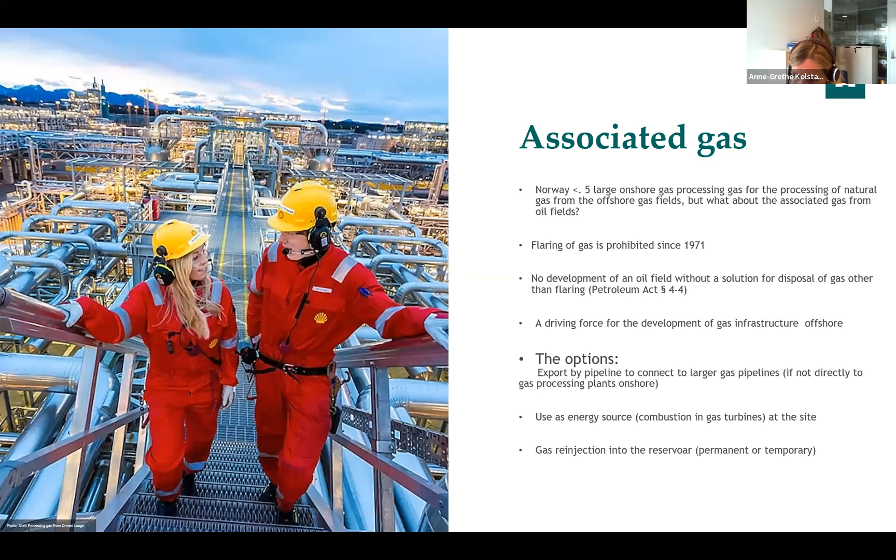The associated gas can be used as an energy source, like combustion in gas turbines at the site, or the gas can be re-injected into the reservoir, permanent or temporary. So those have been the solutions to associated gas. Yeah, the flaring history in Norway, as I said, it has been prohibited, but flaring is still necessary for emergency and some maintenance operations. Actually, the petroleum authorities issue yearly permits for a certain amount of gas to be flared for such purposes.

And we have had the CO2 tax from 1991, and later also the ETS quota system, which provide incentives to further reduce flaring. So although flaring is now limited to shutdowns, startups, and pressure relief for maintenance and process disturbances, there is still a potential for further reductions.

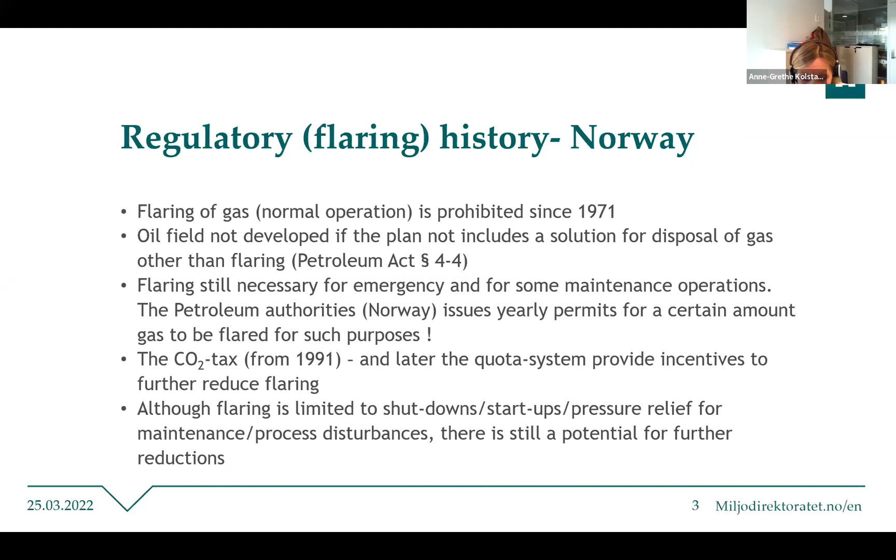Besides flaring, venting and fugitive emissions are widely recognized as significant sources of GHG emissions and air pollution. Other sources of emissions of polluting substances and subject to regulations in gas processing are the fuel combustion in turbines or engines, sulfur recovery units, and loading operations. Methane is highly in focus, but carbon dioxide, VOCs, sulfur dioxide, H2S, and mercury, as well as the BTEX, must be controlled as well.

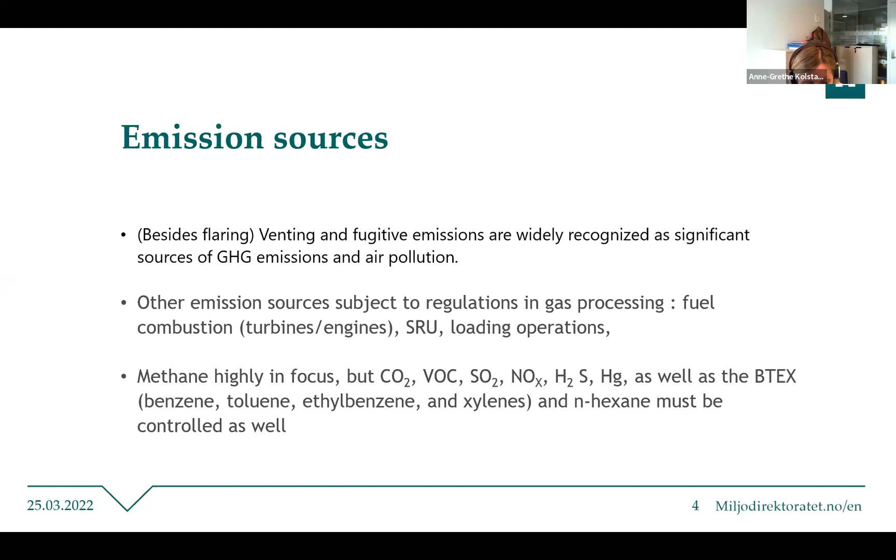We have available in Norway a set of regulations and economic instruments for keeping low emissions. But we also have tough goals with regard to reducing climate gases. And the oil and gas sector is our main source for climate gases and main target for the reductions. So we need both regulations and economic instruments to achieve this goal.

As we discussed the first day here, the EIA is a key to get it right from the beginning. Even if other regulations are missing in the country, the EIA process is suitable for us regulators to put pressure on the developer to come up with the best solutions. In my experience, in most cases the EIA will, and of course it should, conclude that the proposed mitigation measures will ensure that the environmental impact for a particular project is modest.

However, this is not a guarantee that the best available techniques to minimize emissions have been chosen, and we should push for the best solutions. So even if we as regulators don't have the necessary knowledge about alternative technologies, we can require that the proponent deliver an assessment of available technology or techniques and his justification of the choice made.

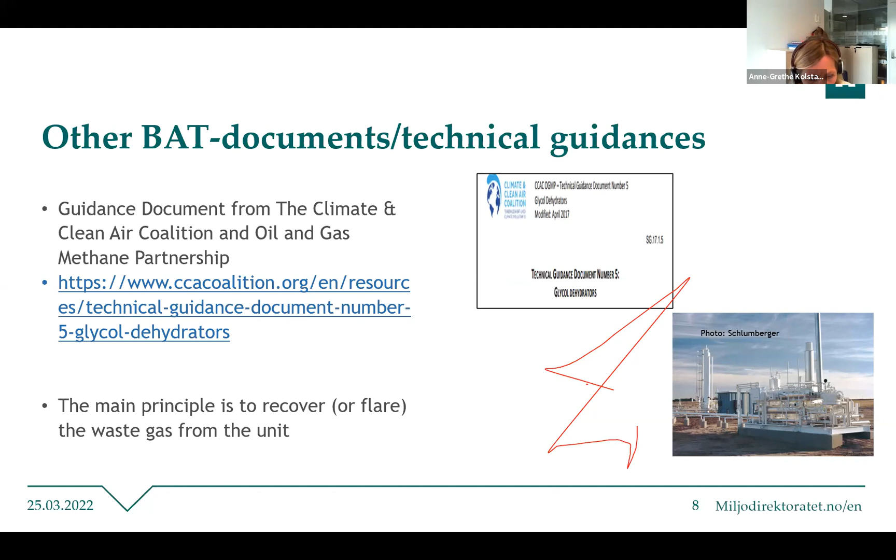There are other technical guidance documents also on what is BAT. For example, the Climate and Clean Air Coalition and the Oil and Gas Methane Partnership have issued a lot of technical guidance documents. This one here is on glycol dehydrators in particular. So they can be quite useful, and these organizations are very eager to have these documents spread, distributed and used.

We have made in Norway reporting guidelines on venting and fugitive emissions. And we have a very strict regime on reporting. With this guideline we will make sure that all the operators calculate emissions in the same way.

So we have done a lot of work with regard to achieving better emission data from the operators. And this document includes source-specific methods, including measurements, calculations, modeling, depending on the actual source. So the recommended methods are described in this document. The manual targets emissions of hydrocarbons from venting and leakages, mainly.

Compliance monitoring, that is a very important part of the regulators' work and enforcement of the regulations. We have a quite good relationship and a good dialogue between operators and regulators in Norway. But the regulator's role is clear and professional. We do not mix the roles, even if Norway is a small country and we always meet somebody we know at the other side of the table, but we still strive to be very professional in our role as regulator.

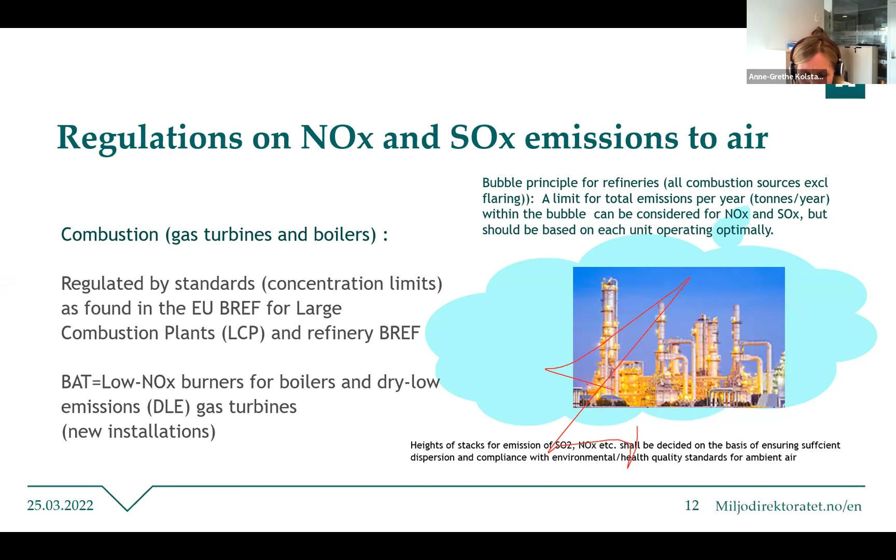Also, discharge of water is very important, and all waste streams shall be treated before discharging and disposal. The same EU BREF documents I referred to also stipulate standards, concentration limits for a long range of chemical parameters. For example, total organic carbon, oil, benzene, ammonium, a lot of chemicals. And the standards reflect what you can achieve when you have an efficient wastewater treatment plant. And if you have a very sensitive receiving environment, you may even put stricter limits on the wastewater.

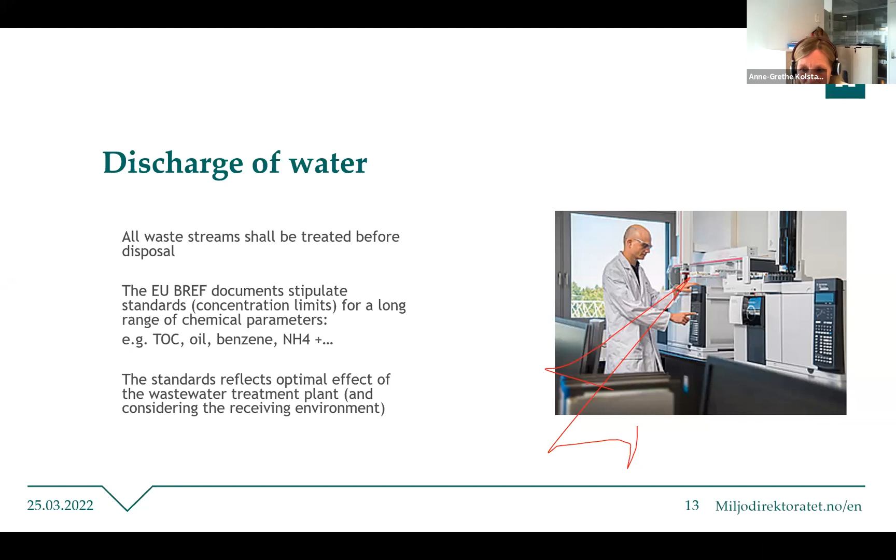So the CO2 is not used for EOR, so it has no value. It's merely a way of getting rid of the carbon dioxide so that the operator doesn't have to pay the CO2 taxes for it, and it looks good on the national inventory of emissions of carbon dioxide. So by this technique, 1.5 million tons CO2 per year are geologically stored instead of being emitted to the atmosphere. And there will be more of these CCS facilities in the future.

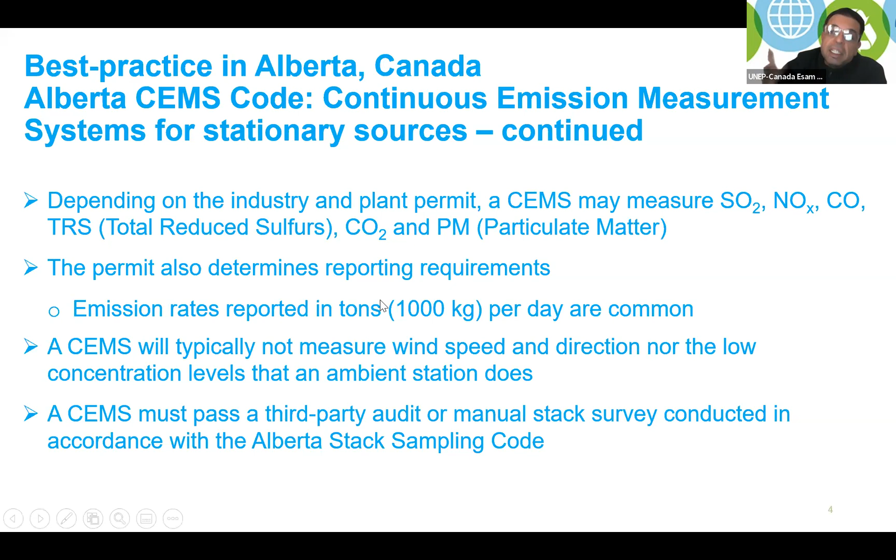Now, do we do an audit? Like, how do you make sure as a regulatory body that the operator is basically doing what was agreed on in the permit? So do you need third party validation, auditing, maintenance? What do you need? And how often? Those are very important information for a regulatory officer and the regulatory body. We must identify all of those at the permit level rather than at the actual operation level.

The continuous emission measurement system is also telling the operator how to measure the contaminant, how to measure the concentration. When I say how, I mean the tool. What is the science? What is the tool that is acceptable by the regulatory body or entity? For example, I'm listing here some of the stuff we use in Canada. It's not exclusive though, you can change that.

But in general, we ask the operator to measure the SO2 by something called UV absorption. The NOx by the absorption or the chemiluminescence. The CO and the CO2, there is a technology called NDIR. Opacity is used for particulate matters. We are not telling the operator where to buy those devices. No, as long as the operator is following the permit that we gave him, we are fine. All we need is: measure this contaminant this way by this tool, and this is how you report it to us.

So the permit in this case is more or less an agreement between the regulatory body and the operator, in which the regulator has to tell the operator what to measure, how, when, how to report. All of those details must come in the permit as well. This is what we call the continuous emission measurement system.

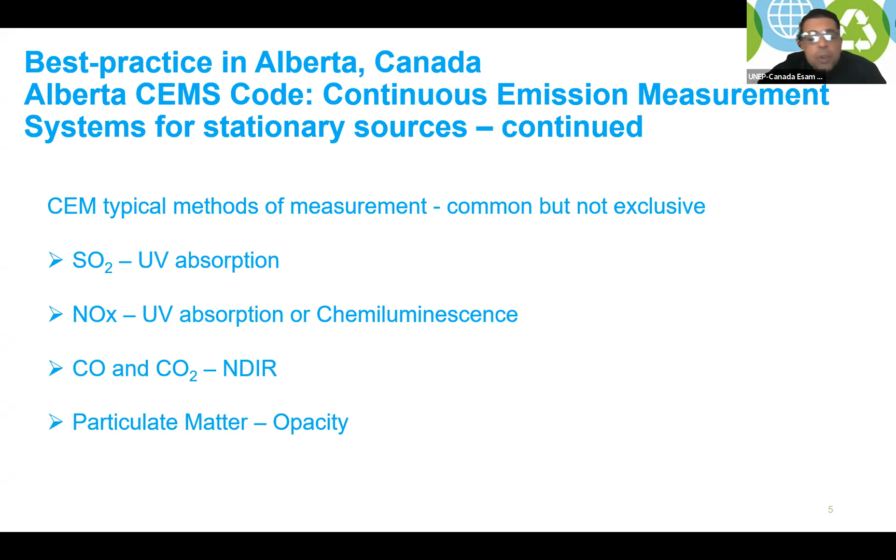How do you sample? How do I take a sample? All of this has to be mentioned in the continuous emission measurement system according to the authority, whatever you are adopting in your country. It has to be referred to in the permit as well. So we need to tell them, listen, you have to do the sampling for H2S by the in situ measurement or by the extractive measurement.

What is in situ? Well, in situ means you have a probe sitting in that particular place always. And this probe, every, let's say, 5 minutes, takes a reading and sends it to a computer, and this computer will record it. And then at the end of the day, or at the end of that particular period of time, all of those readings have to be reported to the regulatory officers.

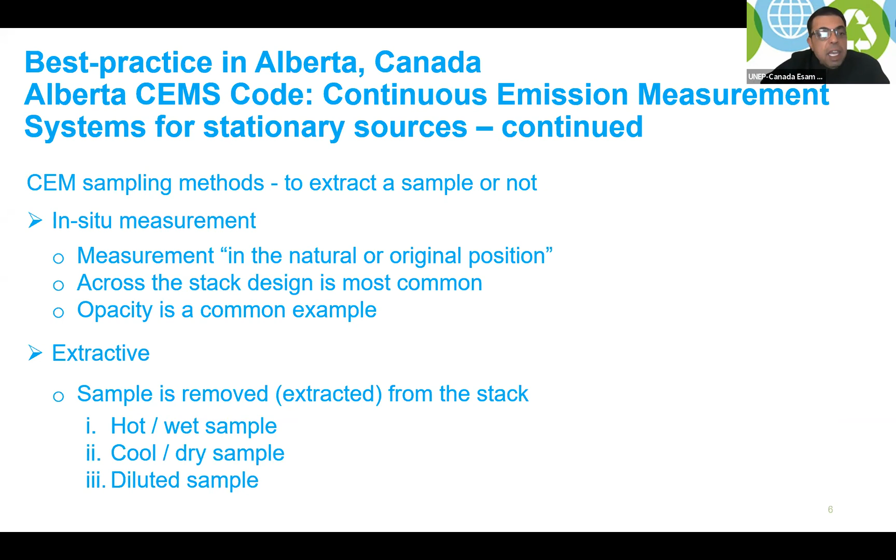Measurement, how do we do the measurement? Where exactly am I putting the probes? All of this is mentioned. In Alberta, it is mentioned under the CEMS code. So again, let me remind you and remind myself that the word code means law. Okay. The extractive method is also recommended.

Which one is better than the other? It depends, again, on the project, on the technology, and, of course, the location. For example, if I am near a river, and this river is actually feeding and watering the whole city, well, what do you think? Shall I take a sample every week? Shall I do a continuous sampling system?

Well, the location is basically a health concern because it's near the river that feeds the whole city or the whole province. So I should actually pay more attention to the environmental concerns. Now we are talking about health issues. We are talking about social issues. Plus, of course, at the top of that are the environmental issues.

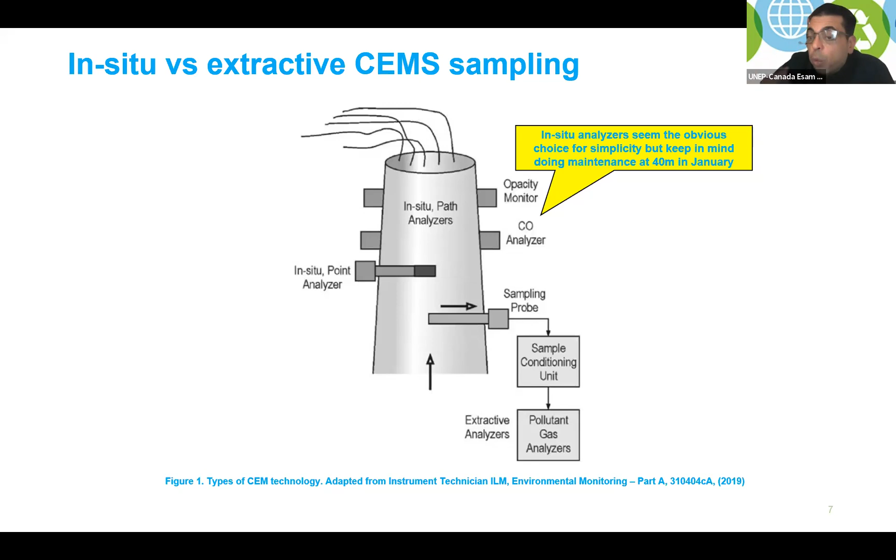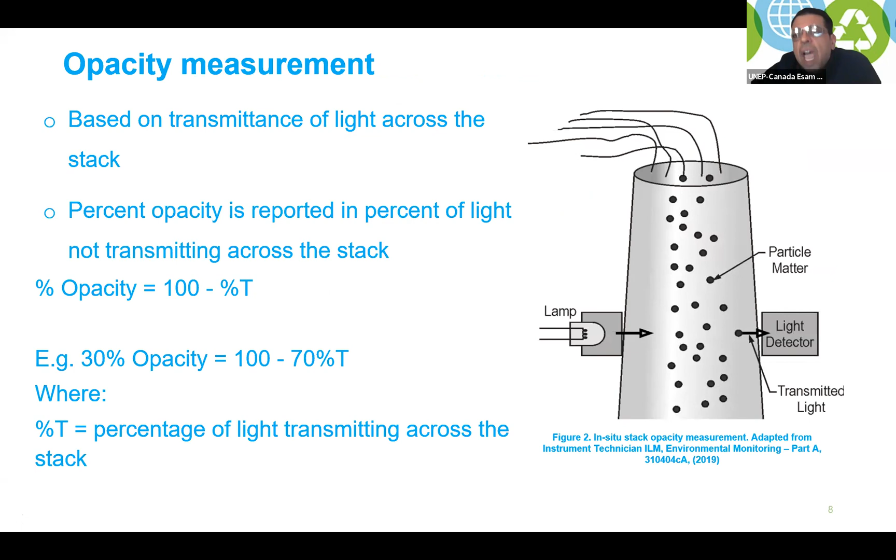The particulate matter, we said, is measured by a certain technique. It's an opacity technique. Basically, what we do here is we measure the particles by light. So this is one of the techniques we are using.

The code, which is the law, by which the continuous emission measurement is designed, installed and operated, has to be agreed on with the operator and the permit. So all of those details. So again, the permit is not only one piece of paper that tells the operator, okay, you are good to go. No, it has to tell the operator exactly how to measure things, how to report, all of those kind of things.

In case there is an issue, the regulatory officer found that, you know what, this reading is over the limit always. Okay, and what shall I do? Well, just ask for a sample. And this sample has to go to a third party. This third party will identify the values. And then, of course, they have to be compared to the local standards. From there, you can determine whether this operator is actually following the permit, or unfortunately, there is something wrong that has to be adjusted.

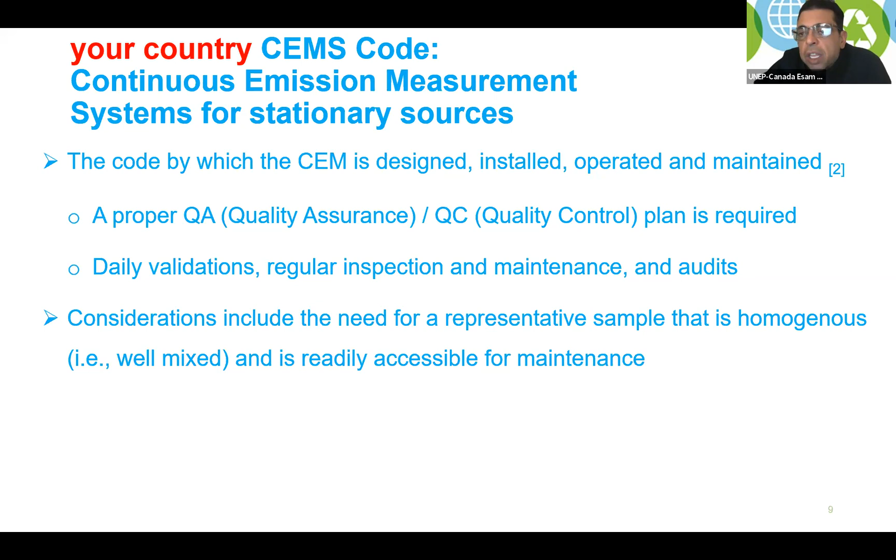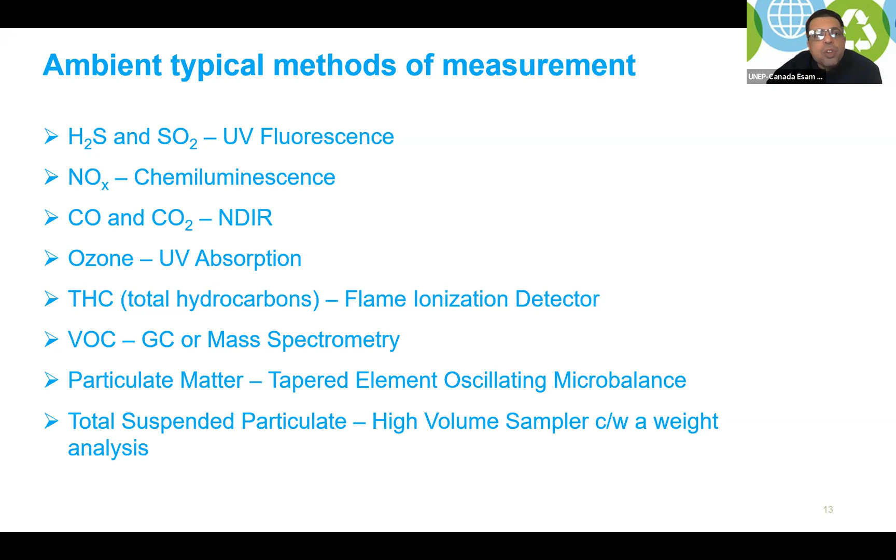We always talk about ambient typical conditions. So how do we measure that? First of all, what do we measure? Well, we measure H2S, SO2, NOx, SOx, ozone, total hydrocarbons, and total hydrocarbons are more into the associated gas as well. VOC, greenhouse gases, total suspended particulates, all of those values can be measured through the ambient techniques.

The wind speed. Okay, why is the wind speed important? Like, why do I need to measure the wind speed? And why do I have to mention it in my permit? And why should I recommend to the operator to do it? Well, it tells you how fast things can move and in which direction. Accordingly, you can determine whether the values you are getting from the monitoring system are suitable for that location or not. Again, we are talking about location, projects, a country, technology. So in some of the locations, you may need this technique, and others you may not. So all of those are available. You can utilize them. Again, it depends on your country, the project, the technology, the location.

And let's all remember that the permit is attached to the location. It is not attached to the company, meaning when you give the operator a permit, that operator is permitted to operate in a certain location. If that operator moves, then another permit has to be processed and issued. The permit is always attached to the location. Please remember that.

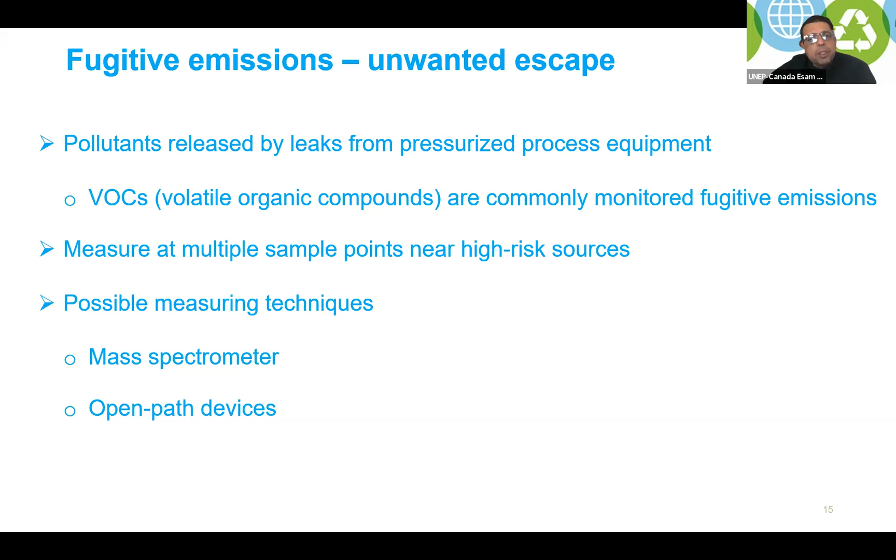So why are you focusing more on the oil and gas industry and mainly associated gas? Like, how can I tell everybody that associated gas is not similar to any other technique? It is not like the power generation activity. The associated gas may have more sulfur in it than any other process. So in this case, the acid rain will be very important to take care of.

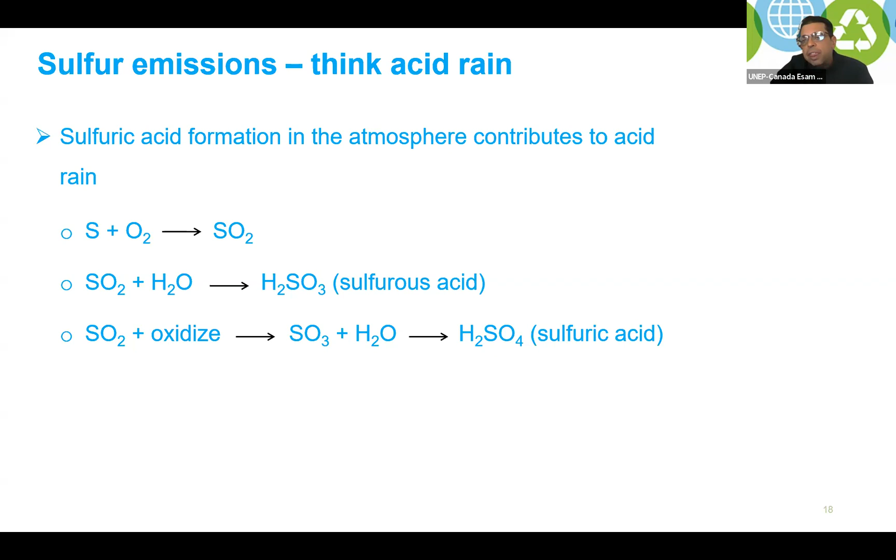Again, where is the location? Am I near a river? Then if I have the acid rain coming down to the river, it will end up in every house in the city. Now we are talking about social, we are talking about health, and of course, at the top of that, we are talking about environment.

Sulfur emissions in general, they will form some psychological effects, some health concerns, social. Of course, the operator needs to know that if he releases sulfur to the atmosphere, then he will get it back in terms of corrosion. Okay, so it's actually for the operator's benefit, as well as the country's benefit, as well as the people's benefit, to stop sulfur emissions, mainly.

Nitrogen oxide. Nitrogen oxide can have different effects. That's why we care about that particular contaminant. There are lots of solutions for how to capture nitrogen, what you do with it and how you can utilize it. I think module 2 was full of those alternatives.

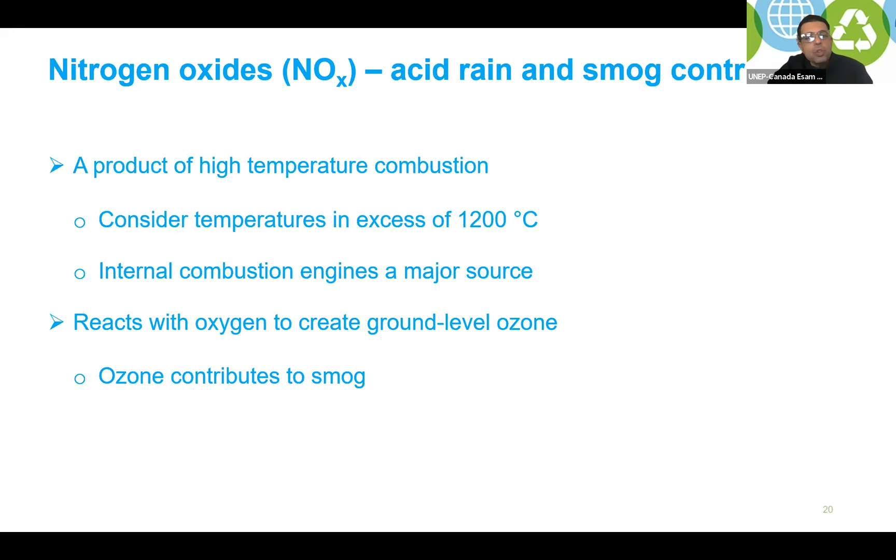The most important thing here, if you guys remember, smog is a word that was derived from smoke and fog. And if you guys still remember the picture in module 2, where we shot the city of Calgary with all of those fumes at the top of it, and we said smog is a problem.

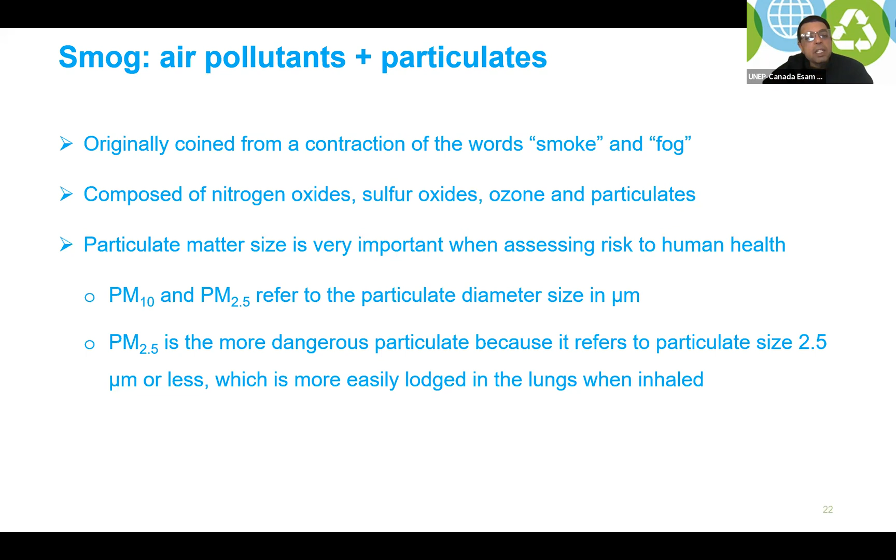Because if you guys remember the clever person who decided to build a taller stack, and he said, you know what, let's send it to the high level, and then dilution to pollution is a solution. Okay, now in Canada it didn't work because we have a very cold climate, and all of those, I would say, pollutants, they will come back. They are not going to be released to the atmosphere.

Greenhouse gases, we are all familiar with them, familiar with the effect. I just want to say that we also consider water vapor as a major, we actually forgot to talk about it in module 2, so I got the chance to speak about it here. Water vapor is always considered as a pollutant as well.

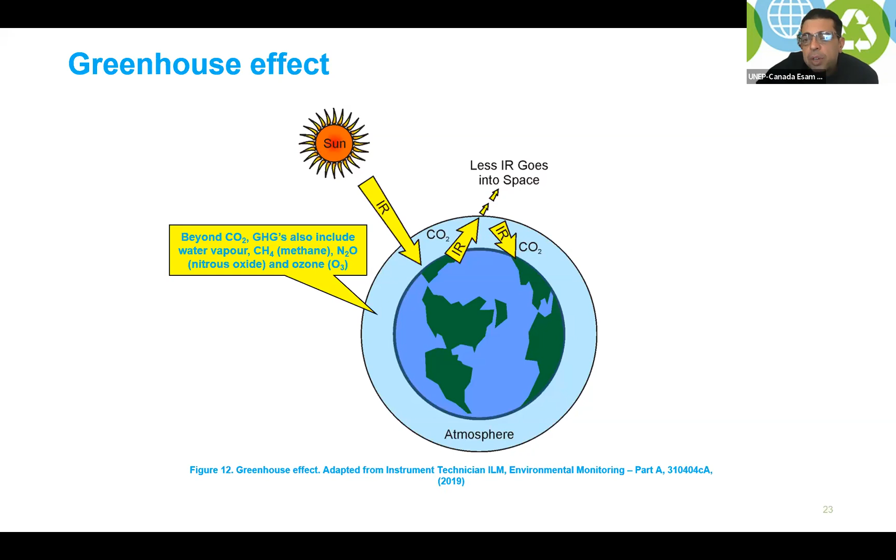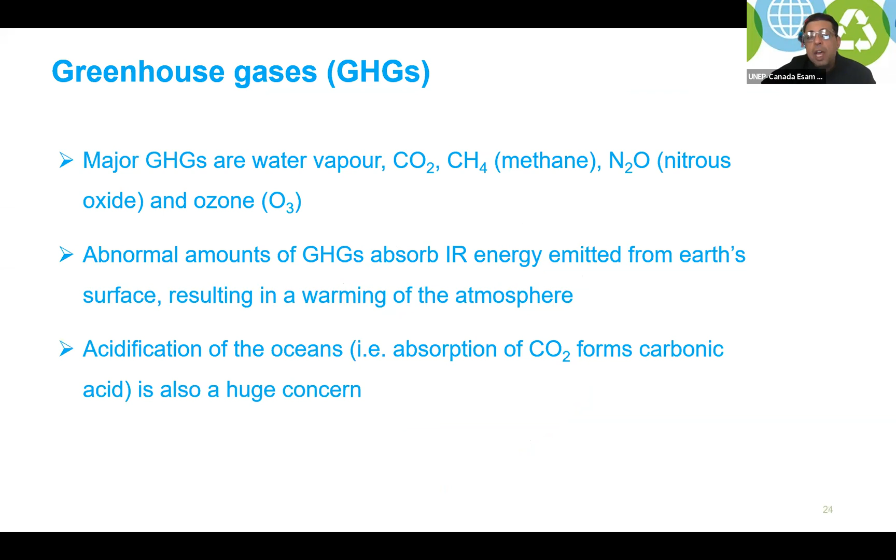So where is it coming from? Well, remember guys that the dehydration unit is there. Dehydration means I remove water. Also the amine unit is another source of water vapor as well. What are they responsible for? Well, you know that greenhouse gases are very important nowadays. They are responsible for several concerns, environmental concerns, and other concerns as well. We do have implications. It's proven now that they affect human health as well.

The ambient conditions also apply for water quality. Remember, we spoke about air, humans, air, water, earth, and other living partners. When we talk about water, we do have major concerns environmentally and also health-wise for the water that comes out from associated gas. Remember, we said associated gas may have some water content in it.

Okay, what do you do with this water? Can I just dump it in the nearest river? Can I just throw it in the nearest sea? Or maybe there is also another clever person who decided to drill a hole and just dump that water inside, leave it there. Okay, well, if you don't see it, it does not exist. But that's wrong. If you don't see it, it exists, and maybe you do not see it today, maybe you do not feel the effect today, but believe it or not, it's coming. So we also have to deal with the water quality as well.

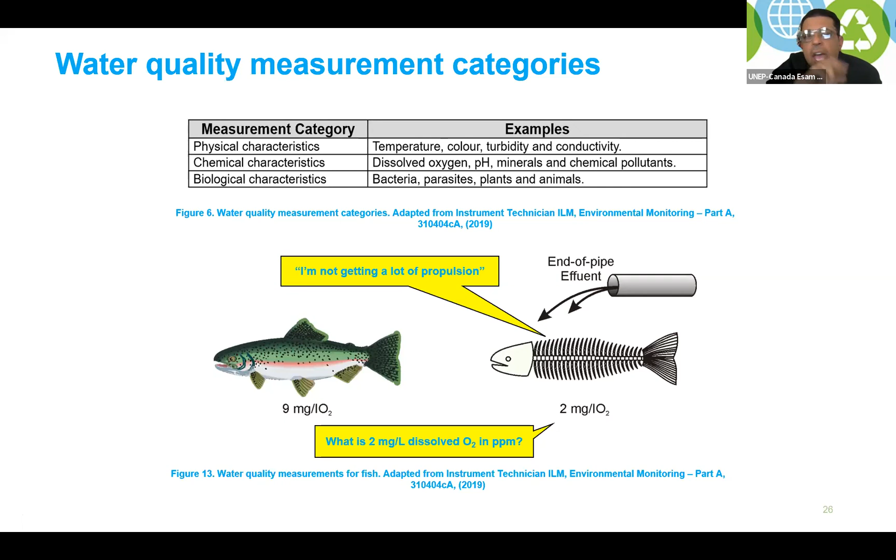Those are some examples of the water qualities and what we actually look at when it comes to the code that we are talking about. Let's look at the industrial in general and also the associated gas industry. What do we want to accomplish? Well, we want to look at the regulations. We want to look at the environmental assessment approvals. And the most important thing is the enforcement.

Now, why am I saying it is the most important thing? Well, believe it or not, guys, we have the regulations, we have the assessment, we have the approvals, but after that, there is no enforcement. Okay, there is no follow-up. And I refer to Anne's presentation when she said there should be reporting and there should also be some inspection.

Okay, so site inspection is very important, whether you are talking about ambient, whether you are talking about continuous, it doesn't matter. You have always to inspect that the site is following the agreement. Okay, what do you mean by agreement? Do you guys still remember the permit? That is my agreement with the operator. I just want to make sure that whatever we agreed on is already enforced.

Okay, we do have fancy environmental laws in place. Are they enforced? And if they are enforced, are they inspected? So the role of the regulatory office does not start and end in the office. It actually starts before and even after. Okay.

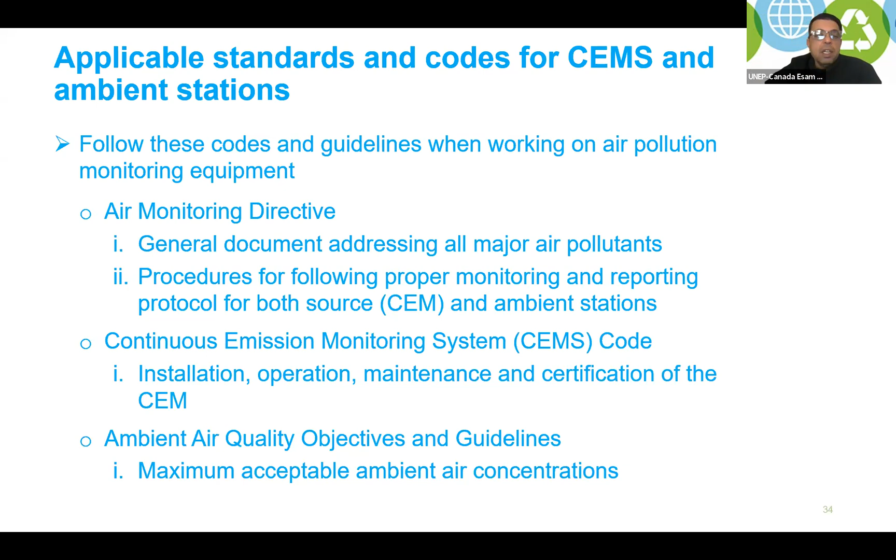So hopefully we got a very quick understanding about what is available in Alberta, Canada. What do we adopt there? How can we build our own standards and our own monitoring system? How do we do that in a country that does not have it already?

And if you have regulatory measures, can you add to it to achieve better, safer, and more environmentally friendly projects and developments? Everything goes back to module 2 when we talked about the BAT, the best available technology. It is always, or should always be, there, because it is changing and you have to capture the best available technique to mitigate and eliminate your environmental issues.

We have to consider safety. We have to consider the SOPs that we talked about in module 2 as well. Let me remind myself and remind you guys that there is always a government, there are always operators, and the research institutes, whether governmental or universities, and they all have to play a role in safe and environmentally friendly associated gas developments.

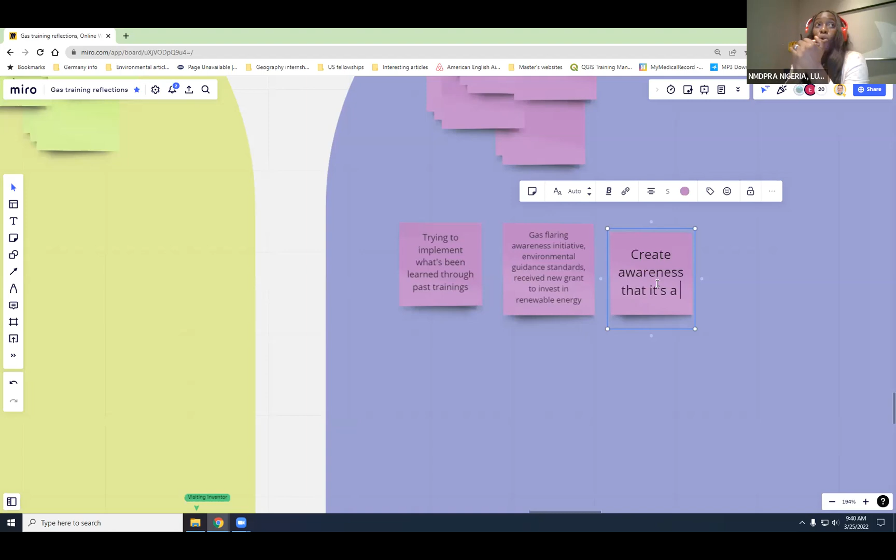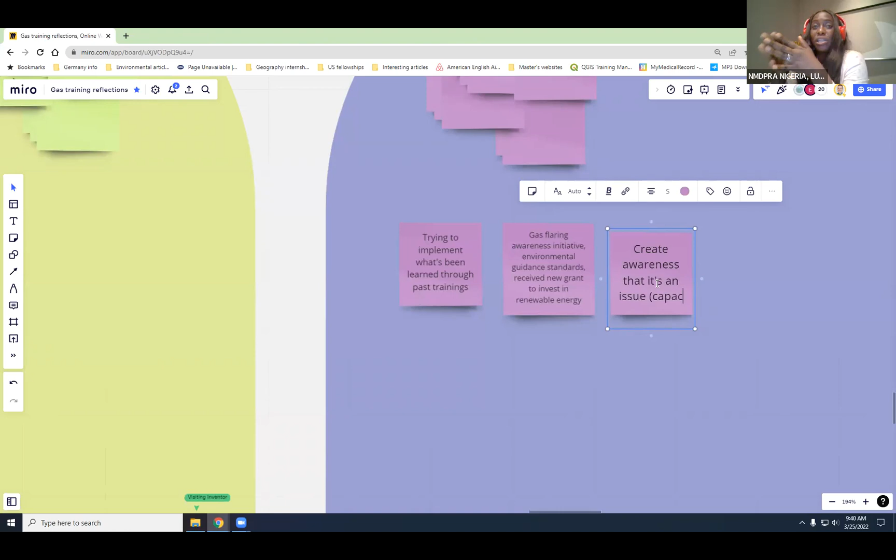Thank you. Thanks, Lucy. But can I ask you, did you discuss in your group what actions you can take as individuals? Oh, we didn't, but I can speak about that. I think what we're doing now is a major action that we can take, building the capacity, creating awareness that this is an issue, especially for those of us working in the regulatory body like where I work, that governs all the petroleum activities for the midstream and the downstream. Building that capacity, attending like what I'm doing now as an individual, and going back there and spreading the word. Thank you very much.

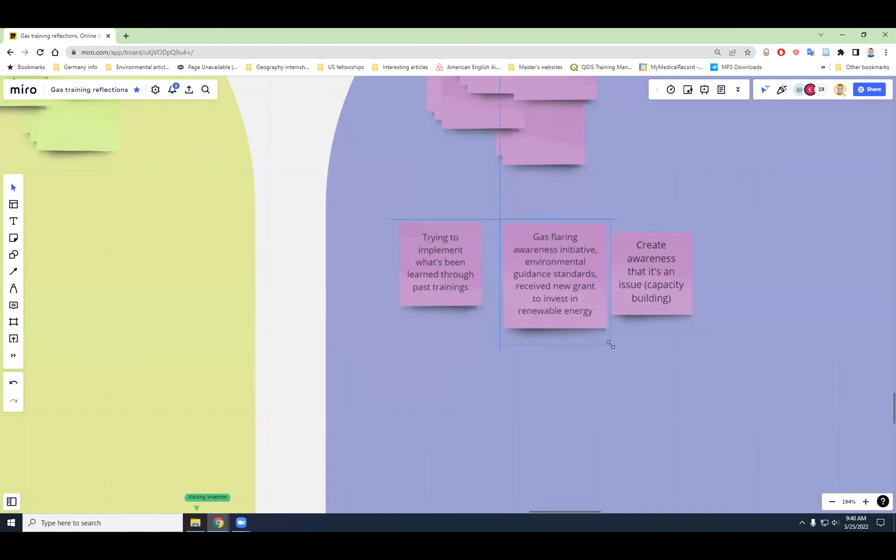Great. Anyone else who wants to share from their group? What priority challenges did you discuss, and what actions did you think about for taking it forward? Can I have other volunteers to share from the other groups? From the other groups? Can I hear, let's say, the Trinidad and Tobago team? Let's put them on the spot as well. Can you share with us from your groups what you discussed?

They might have some connection issues there. How about from, let me see, the Mozambique participants? Do you want to share some of your discussions in your group?

I don't know, are people trying to speak? I'm not getting it. How about you, Taylor, from your side? No, I don't hear anybody. Maybe you should call the groups 1 to 10, because they were in groups. Yes, okay. Because the Trinidad and Tobago team did not go into one group. We went into the assigned groups. Yes, so that's okay. So would any one of you like to share what you discussed in your respective group?